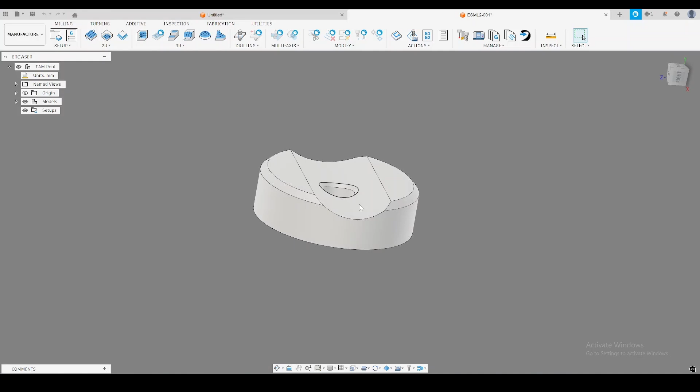Welcome to CAD CAM demonstration number 4. Today we're gonna CAM this part right here. This part has some smooth radii like this, which I will need to do some 3D finishing to be able to finish this surface right here. I've skipped, this part is already CADed, so I will just quickly CAM it.

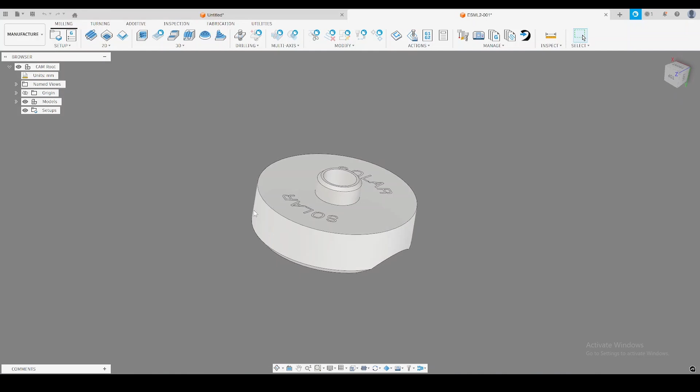I will not be doing any fixturing. If I was fixturing this, I would probably have some sort of fixture to hold this round here to be able to finish the other side. But for this, I'm just going to do it real nice and simple. So to get started, I'm in the Manufacture workspace right here to do my camming.

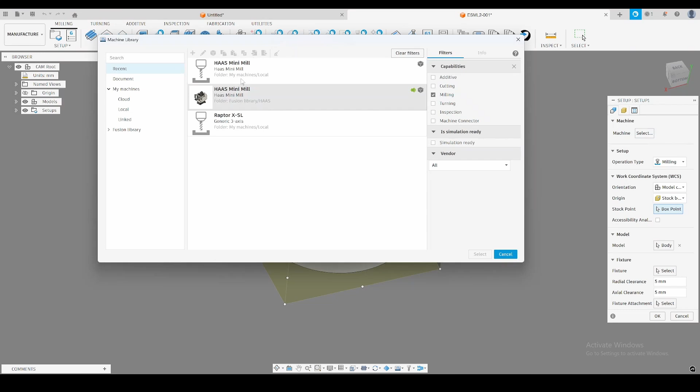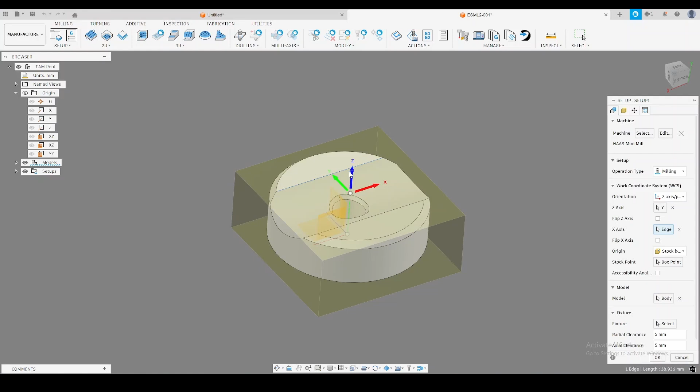So I'm going to do a setup like so. Machine, Haas. I'm going to do orientation Z and X. I don't have any lines easily clickable going straight up here, so I'm just going to go to my origin, and then I think Y. So Z is up. Then X, I will just press one of these. So that goes sideways. This is okay. If Z was going downwards, I would just flip it.

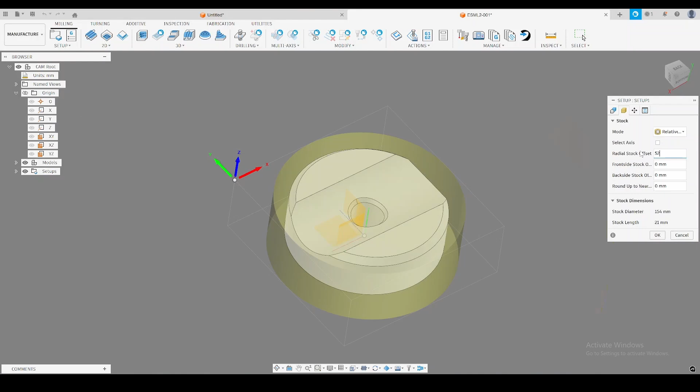I will have a stock box origin, so I will just pick top left here. I'm just gonna add 2 millimeters to the side, maybe. In this case, maybe I would even go with a relative size cylinder instead. I would probably add a little bit more, maybe 2.5 to the side. I would add 1 millimeter to the top, and then maybe 5 at least on the bottom, like so. This makes it a little harder to grasp on using cylindrical stock like this, but that's fine.

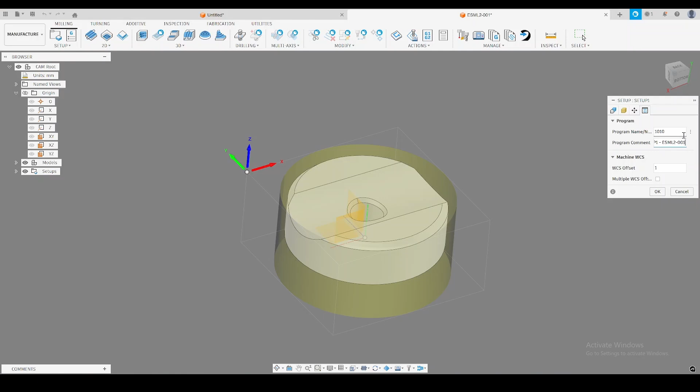I'm going to call this 1010, and then this is operation 1, ESML1-001, I believe. No, I'm sorry, ESML2-001, like so. I'm going to save this as user default. Press OK. Like so. I'm going to rename this to op1, operation 1. Like so. I'm going to start by facing.

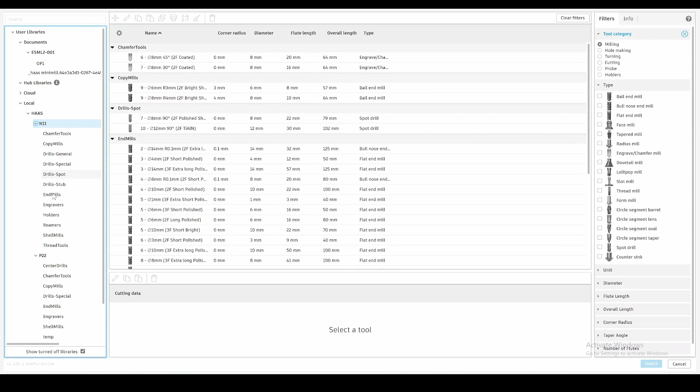This is aluminum. So tool, select. Haas N11 shell mills number 1. I'm going to do multiple depths, 1 millimeter maximum step down, finishing step 0.5, like so. Press OK. That looks good. I'm going to do a 3D adaptive.

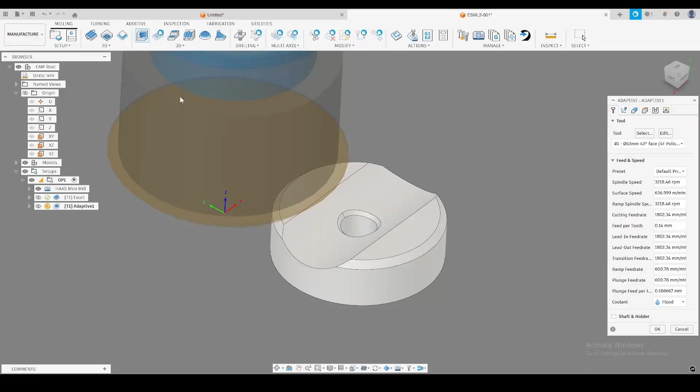Select tool, end mills, 2 flute 10 mil. Yeah, should be the right one. On heights, I'm going to do model bottom negative 0.1. I'm going to ensure 10% optimal load. This should be pretty okay. I'm going to do 0.1, I think, in axial and radial. I'm going to turn on smoothing.

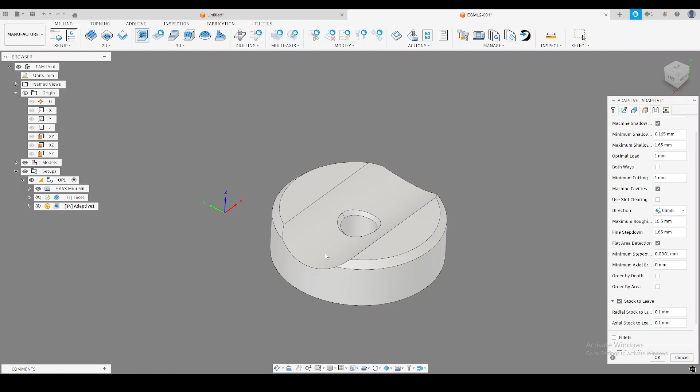I might try machine shallow areas. That's going to ensure that it's going to go all the way here. Otherwise, it might leave a little bit. Press OK. Then I'm going to do duplicate, and then edit. Then I'm going to change the tool. So select. And then I'm going to do the 6 mil instead. So end mills, 6 mil 2 flute. This one should be good. Press OK.

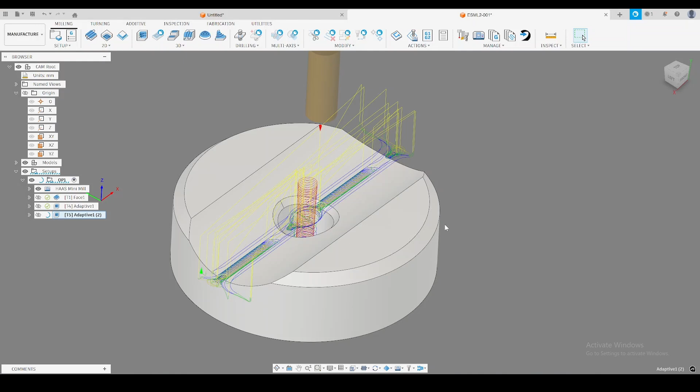And so that's going to, in 2 steps, remove most of the material. This is going to remove probably this as well. Some of this for the chamfer, that's okay. If I wanted to save time, I would certainly remove that because we're gonna remove that with a 45. So it's really unnecessary for it to spend a lot of time removing this as well, because we remove it later, but doesn't matter for this. There's a lot of optimizing, I think, that could be done, certainly.

For starters, with this one, I would turn on both ways. On both, I think I will do both ways. I'm also going to go to linking and then maximum stay down distance. I'm just going to make this a really big number. And this is because over a certain length, it will choose to do a retract and then come back in. But that can add a lot of time.

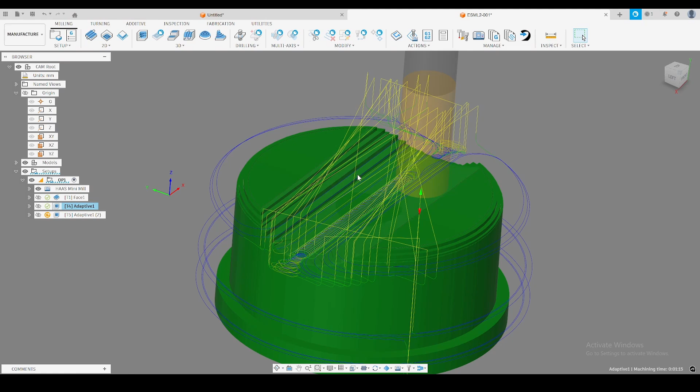So you're going to see still it needs a lot of them, but it really reduces these yellow bows here. And in some cases, having both ways and a really long maximum stay down distance can really, really help on reducing the time it takes to machine something.

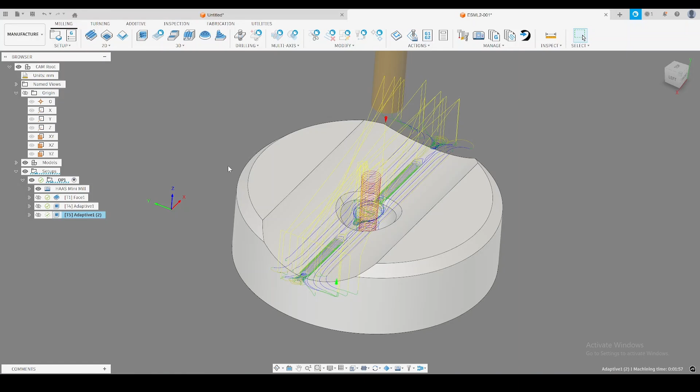Both ways is not as effective. It's best to go climb milling. But in materials like aluminum and wood, it's okay, so I will certainly take the time advantage in this case. It certainly leads to more tool wear, so if you're doing a lot of parts, your tools will break a lot quicker for sure.

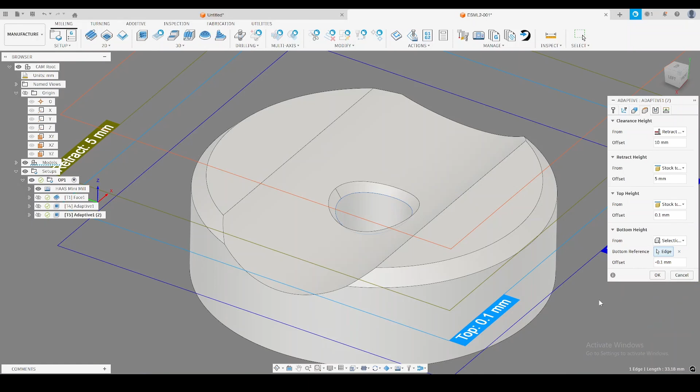It did this hole as well. I think I would want it to not do that actually. So in this, I'm gonna do height selection. This perhaps. I might even do a machine boundary instead. So maybe what I would do is I would do a selection, in between this and this. So now it will only do inside here.

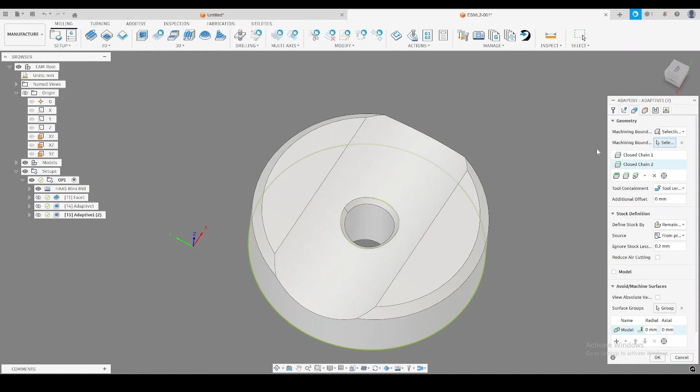I would do probably center on. That means that it can go center on line, but not more. I'm gonna put this back to model bottom. So see how that does. And again, I would rather do a bore here, and I would just save so much on time, save so much on headache. So you can see this is just way, way simpler and doing what I really wanted it to do, you know.

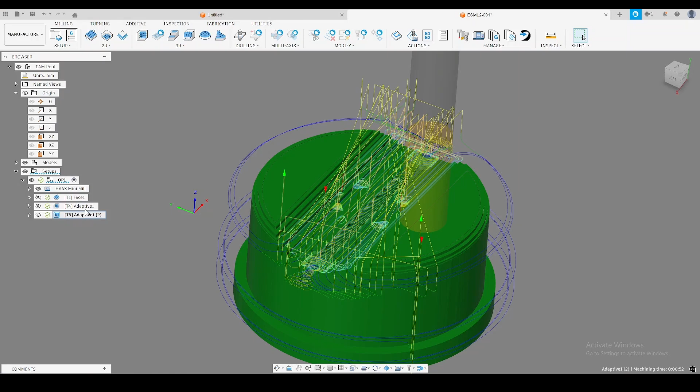So I think it can be really good to be a little more selective like this. That leaves a little bit here, but that's okay. I'm gonna remove most of that anyway. So next I will probably do a bore. So 2D bore. I'm gonna check. That's a 10.5 millimeter hole. I would probably still do maybe an 8 mil.

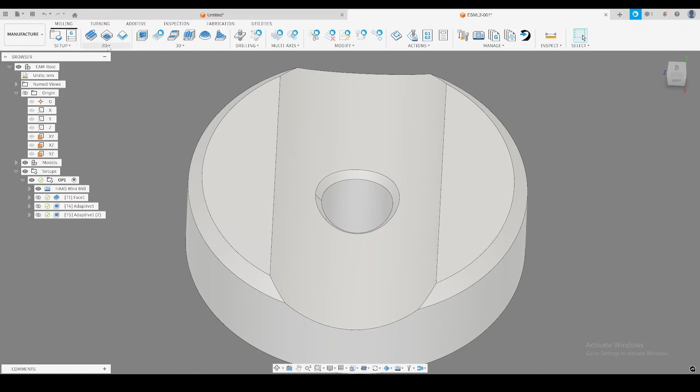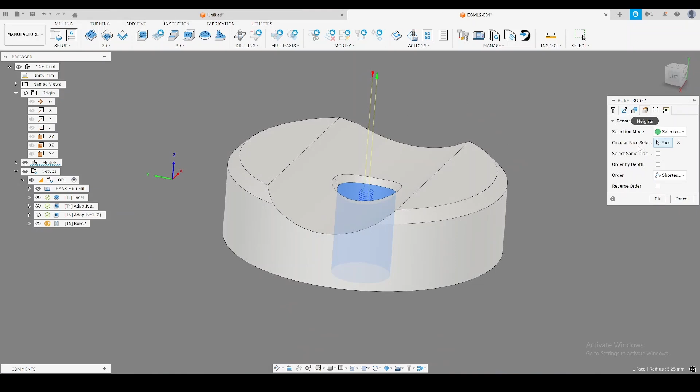So 2D bore, select tool, end mills. This one. Geometry, this. I will certainly make sure that it starts a little higher up, otherwise it might crash. So let's do selection. This should be pretty safe. To model bottom and a little bit more, so negative 0.1. That's okay. Like so. Okay, that's looking pretty good.

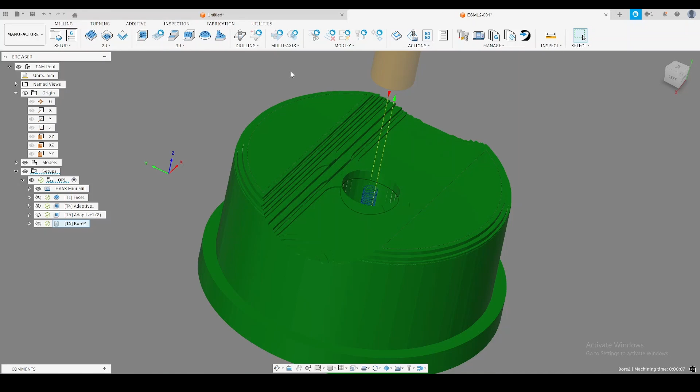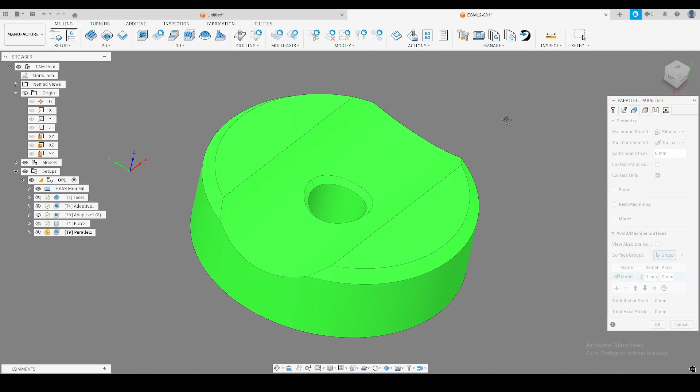I might do a selection. So select this and try that and see what that does. That's okay. That looks pretty good. It really depends on the function of this, which ways I want the lines. In this case, I might want them 90 degrees to this, and that's because there's going to be a swivel on this. And so if they're going this way, even if they're really smooth and really nice, that's going to create this sort of mechanical obstruction, you know.

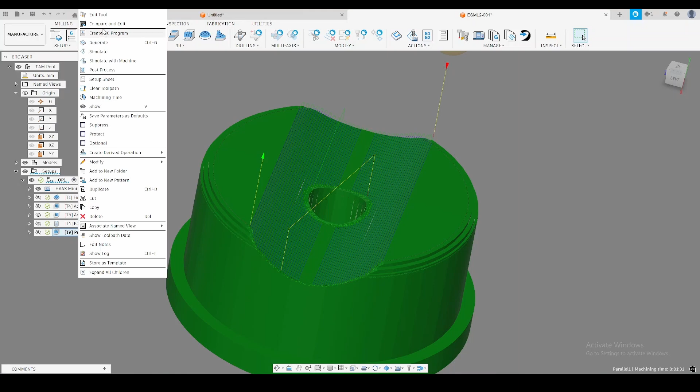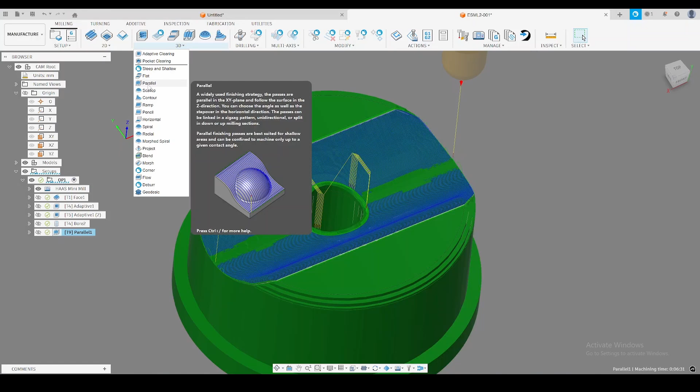So if I go to edit, and then in passes, I'm going to do 90 degrees in the pass direction. And then step over, I'm going to do 0.1. And so that's going to really increase the amount of lines a lot. You can see these simple ones are pretty effective actually in calculation times. There's some more complicated ones, like blend and flow perhaps. These ones are pretty effective, honestly. This looks really good, I think.

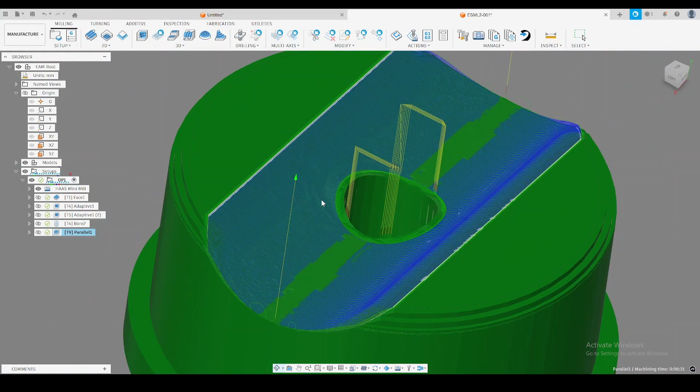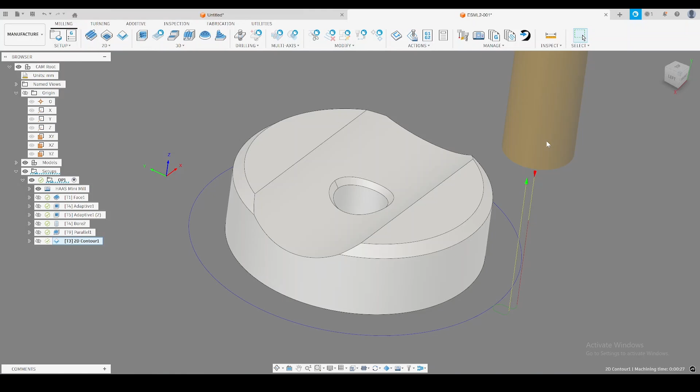That's a good start. Then I might wanna finish the sides and do the chamfer. So 2D contour. Select tool. End mills. I might do 14mm 3 flute. Geometry. This. Go a little bit deeper, negative 0.1. Like so. Then 2D contour again. Select tool. Chamfer tools. 45. Geometry. This.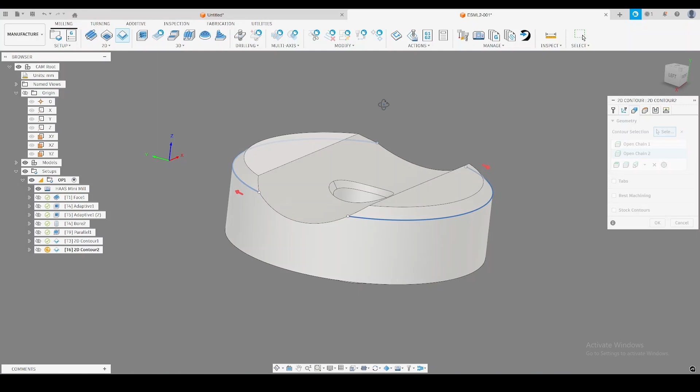So in this case, I don't want it to do it this way. I will select the line again. I will do open chain. Select that one. Press OK. And do the same here. Like so. I'm going to do some tangential fragment extension distance, so that adds just a little bit more distance, so that takes everything. So maybe 5 or something. I'm gonna add some chamfer tip offset. So let's try 1.5 maybe. That's okay.

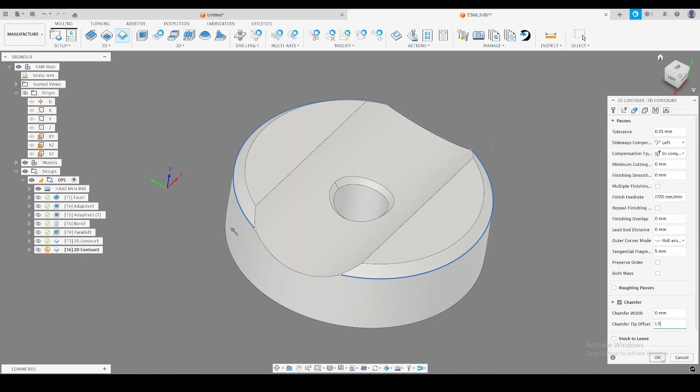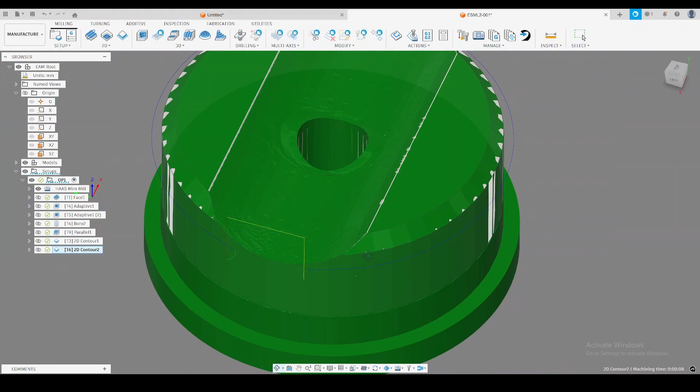That looks good, I think. Seems to have taken everything. So you can see what I mean with the tangential fragment distance. If I didn't have that, it would start right here, and so it might have left a little bit of material right on the edge here. So that's what that does. You just have to make sure that it doesn't crash into something else, or mill into something else. Yes, that looks pretty good.

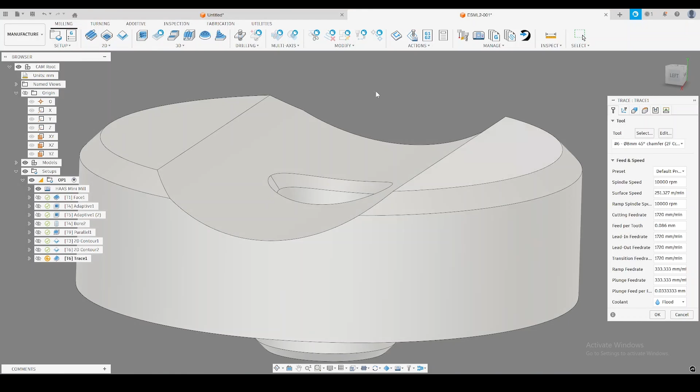Lastly, I would do the chamfer there. In this case, this is not a two-dimensional chamfer, you can see. So this 2D contour will not work because that's only 2D. So I might try trace for this. This one you can use. This one works in 3D, even though it's a 2D operation.

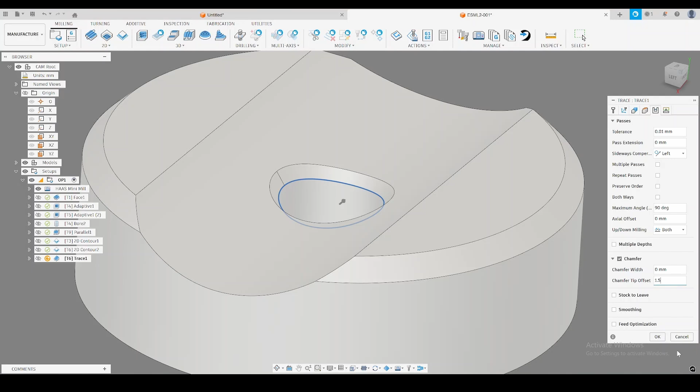I think this one can do, let's see, a left. This one also has this chamfer option. So let's try 1.5. Let's try that. Yeah, that looks pretty good. Might be a little bit too deep, but that should be pretty good, I think. Before I machined, I would simulate and see how deep the tool actually went, so that it's not going too deep. But it should be pretty good.

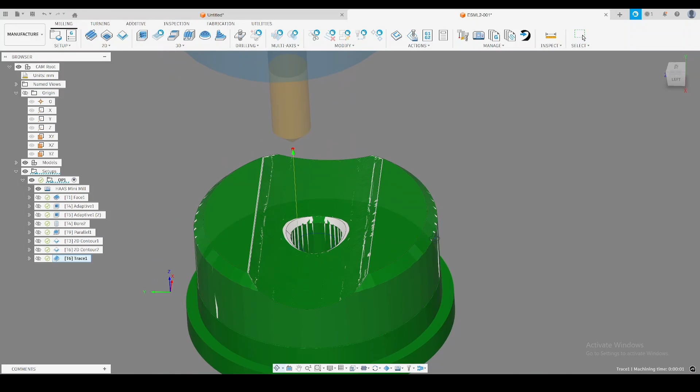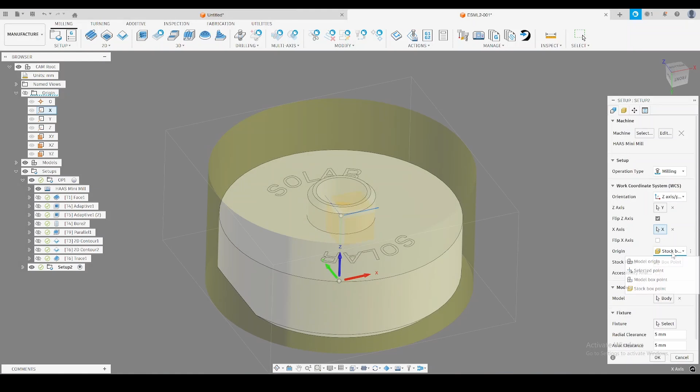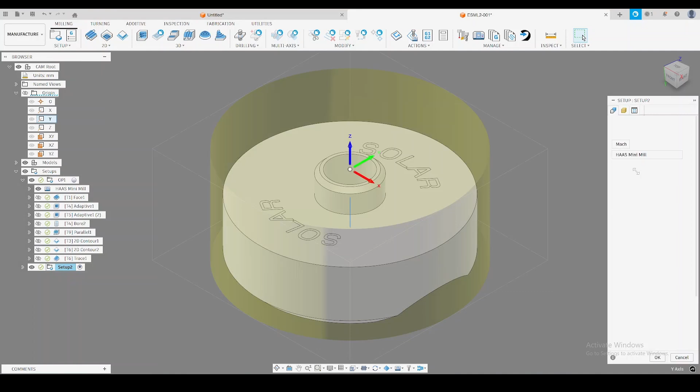Okay, next I would machine the second side. So setup, select machine, ZX. Like so, flip Z. I'm gonna do a model box point. I'm gonna do center like this. Top probably. This is 10, 20. Up 2. That's okay. I'm gonna turn on continuous machining so that I can keep the stock from the last operation.

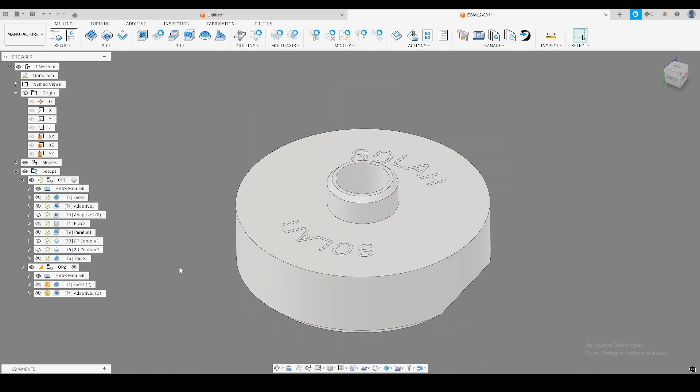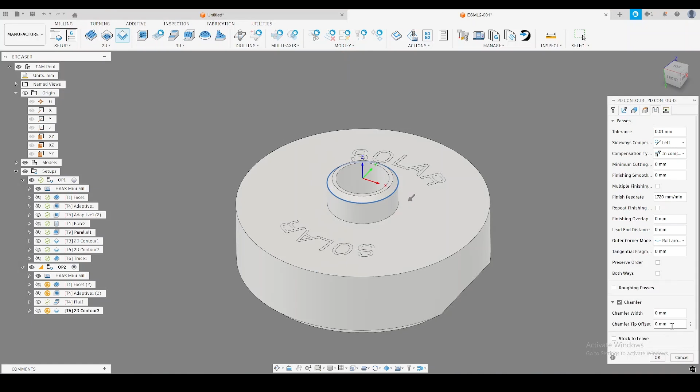I'm gonna duplicate these two, or copy paste like that. Rename this OP2 like so. I'm gonna finish this surface and I'm gonna chamfer, so flat. Just the same tool 2D contour, select tool. Okay, so I will press OP2 here. I will press Control G to regenerate. All right, looks pretty good, I think, with the flat finishes as well.

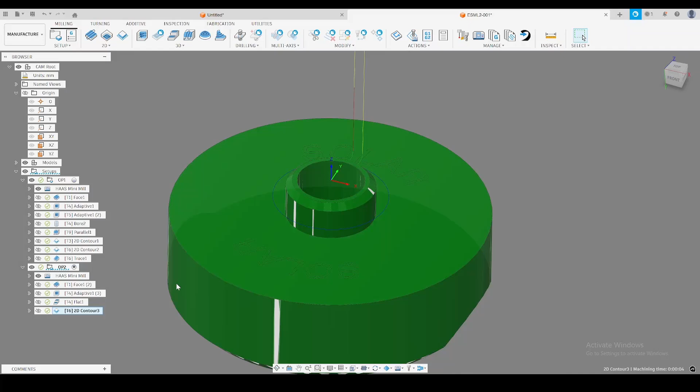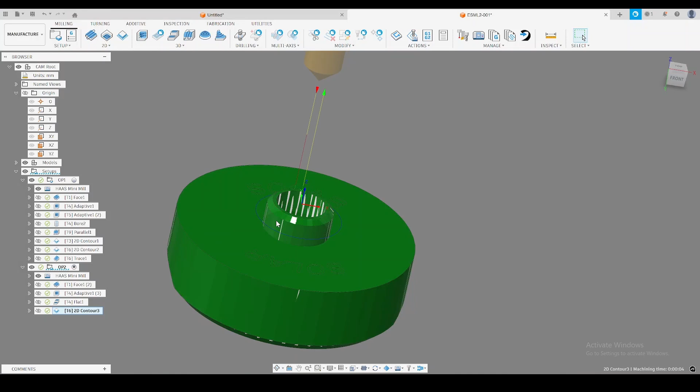If I wanted that really, really perfect, maybe I would do a bore as well. Leave some stock against the surface here, do a bore. Always when you do a 2D contour around a surface like this, there's always going to be a mark where the tool enters. So let's say the 2D contour here, it's going to leave a mark right here. You can't avoid that. In this case, this is a machined surface that's going to go in a T-slot, so I would want that to be pretty precise. So that's probably what I would do.

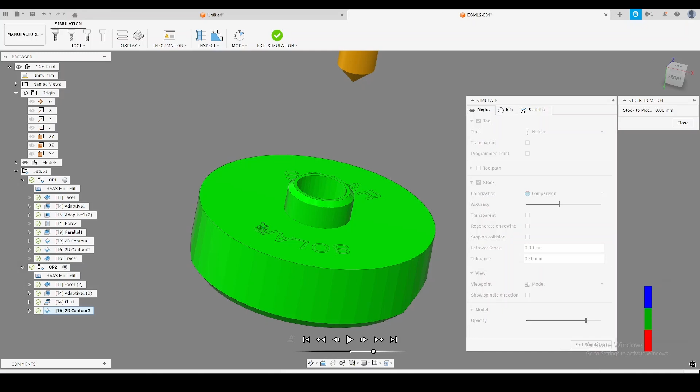To see if I missed anything, I will simulate this. So simulate. Like so. I'm going to go to the end. And then with comparison mode on, I can see if I missed anything. So green is finished, blue is material left, and red is too much. Looks pretty good. You can see where it took maybe a little bit too much when it did the chamfer in here. So maybe I would adjust that a little bit.

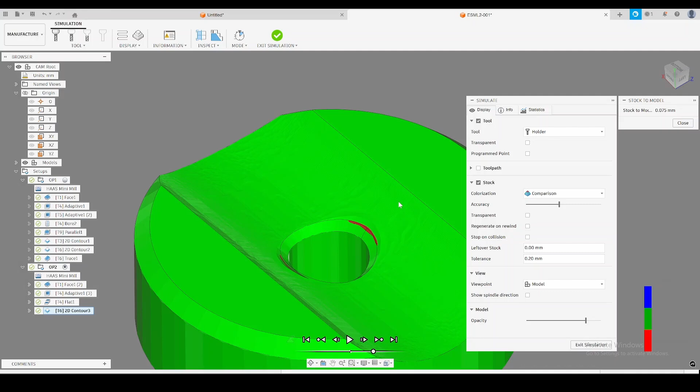Ultimately, chamfers are mostly cosmetic. So unless this was a machined surface that really needed to be really precise, which it's not, unless it went a little bit too deep so there's a little flat spot there, it should be fine. It's not always possible to completely match. I might decrease the stepover of the parallel finishing here if I wanted it to be even more smooth. 0.1 is already pretty smooth, but you can go even further, of course. And yeah, that's pretty good.

That's about it. This has been CAD/CAM demonstration number 4.